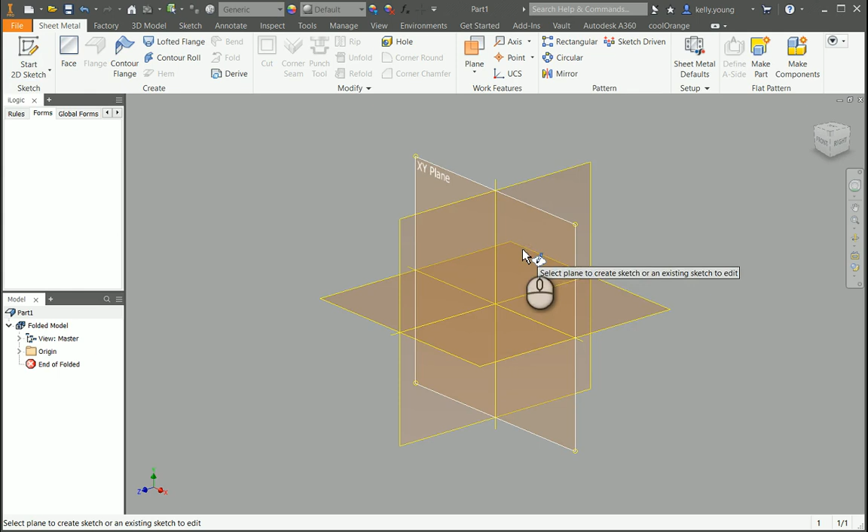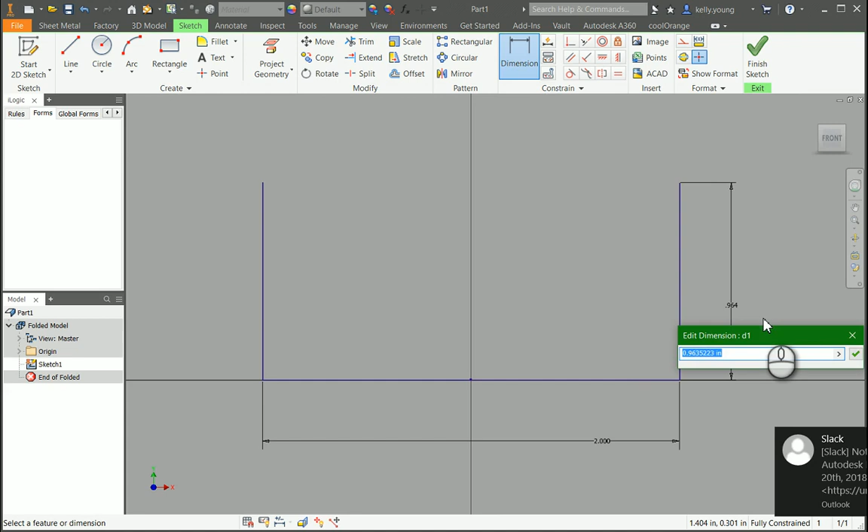Okay, we'll just create a new sketch. Okay, and just draw our lines here and make these equal, and put the center point here to the center here, and set some dimensions for width equals 2 and height equals 1.5. Let's call it 1.

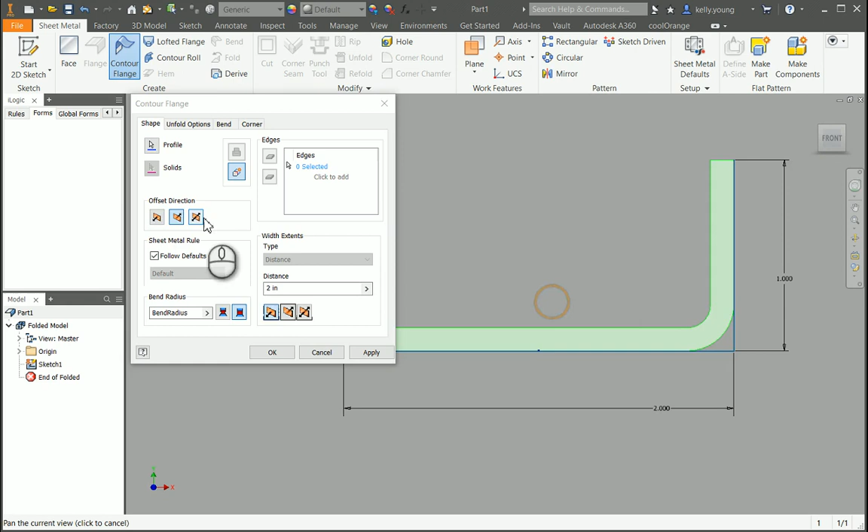Okay, so let's just do a contour flange. Basically select our outside edge. You can flip it inside, the offset direction. So if you actually look at it, you can go inside or outside, so you can control kind of what you want to do. So let's do inside here. And our distance is 2 inches. So let's put that at like 6. So now we have our part.

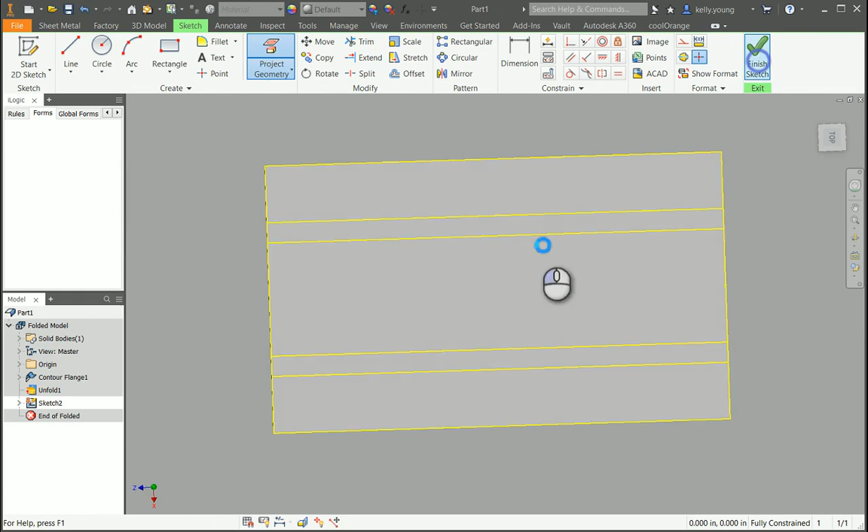We can then create a flat pattern. But before, I'm going to do just an unfold on this face, add all the bends, hit OK, create a sketch, and project our geometry. Finish our sketch, and refold from here, add all our bends, and hit OK. So that basically gives us our flat pattern in the model. You can create a flat pattern after that if you want, and go to our folded part.

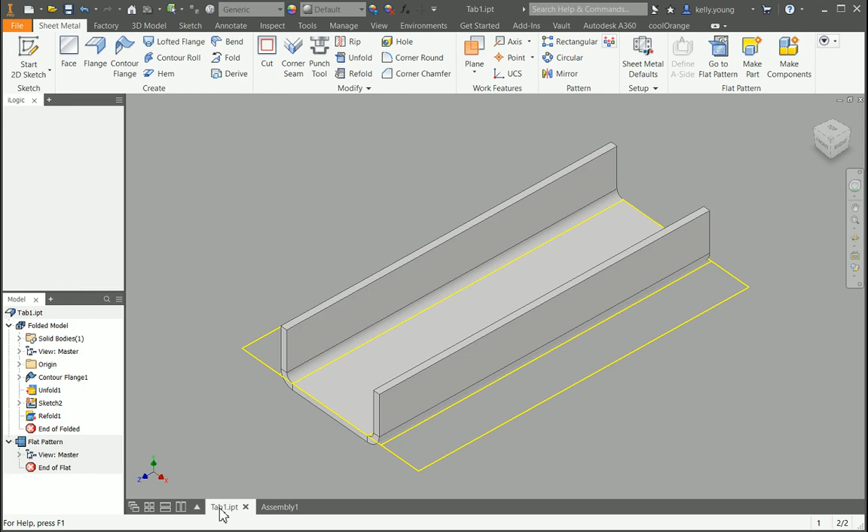So I'm going to save this, call that tab 1. I'm going to create a new assembly here. Go back to my tab part. Just right click on the model, copy it, come into the assembly, paste it in. So now we're going to create a new part and name this tab 2.

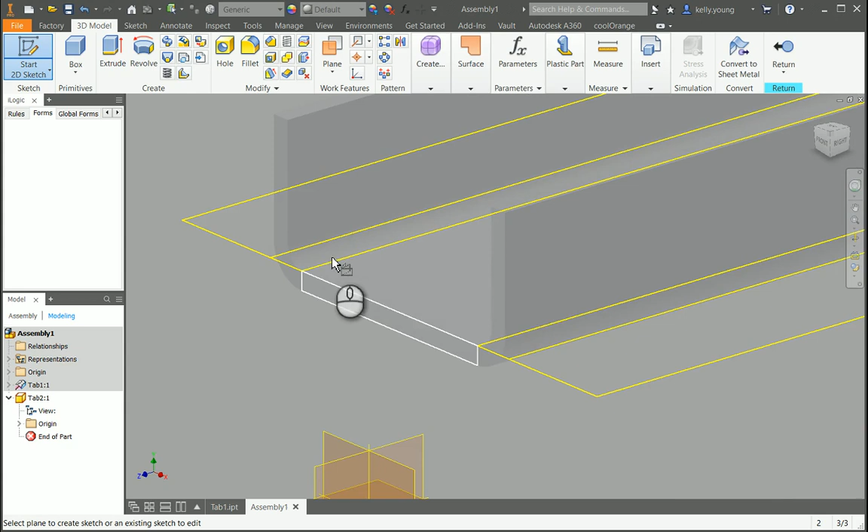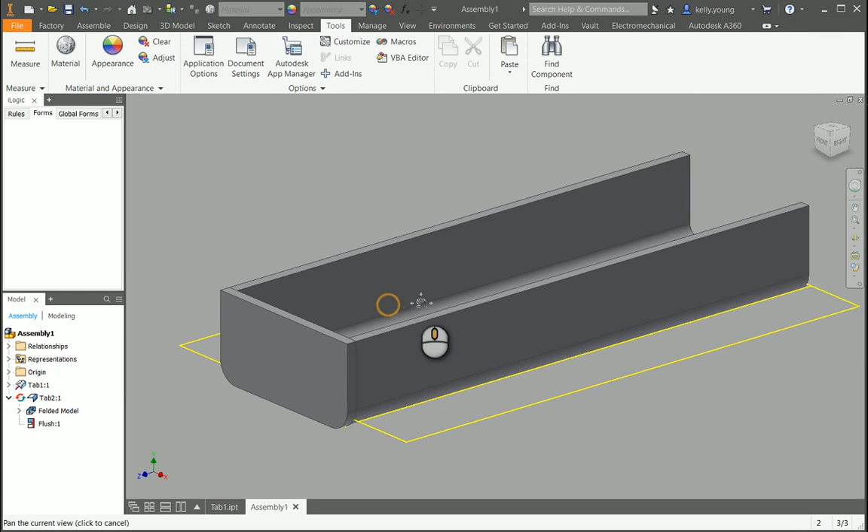Okay, so if we go into our tab 2, let's start a sketch on this end face. And I'm just going to project the geometry around and draw a line through the top. Then we'll just convert that to sheet metal and make a face real quick, coming off the other way, this way. Okay, and return. So now we have our part, and here's our little tab, here's our little thing.

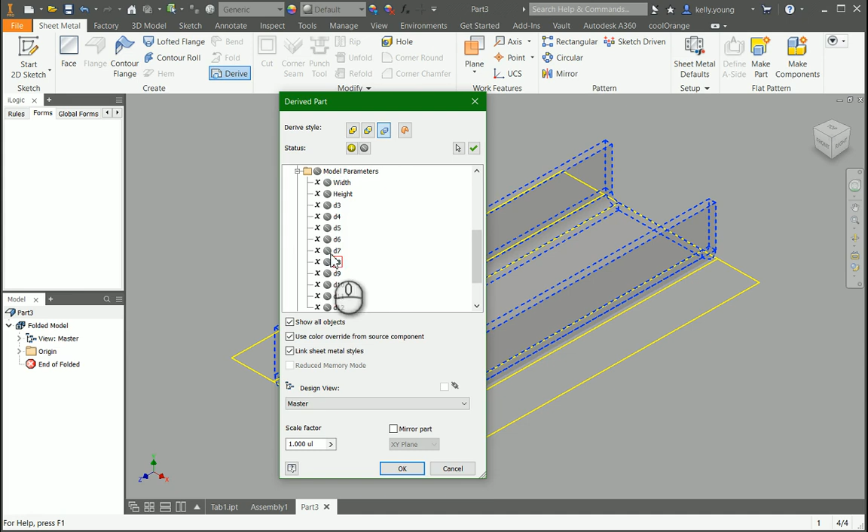So now we can basically create a new part of sheet metal. So you select the part. Now I'm going to turn off all the solid bodies, and I'm only going to bring in the sketch 2. You could bring in this first one, but we're also going to bring in the reference parameters of here. So height and width, and also the sheet metal thickness. I'm going to bring that in as well. So now we have our part.

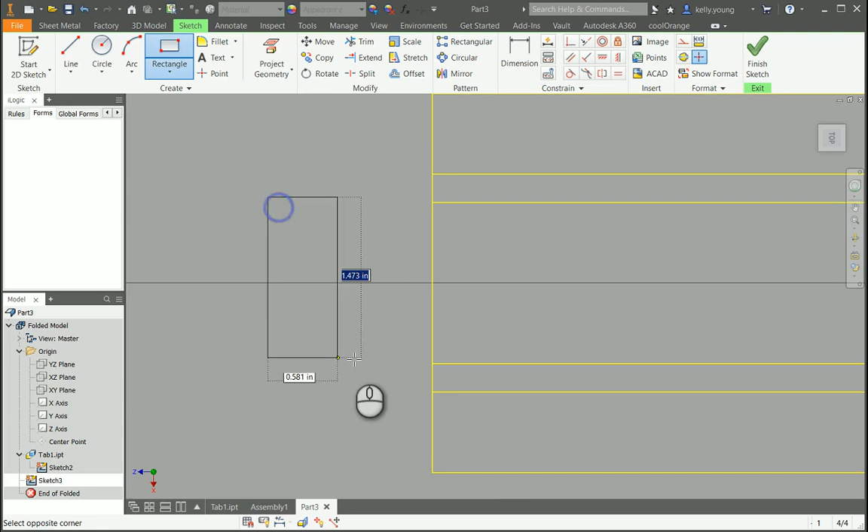So we can go to our origin here, tab 1, and create a sketch. And we can do that. Call it our fillet at thickness times 2. Call that at the width. The height. And we're just going to draw a little box right here.

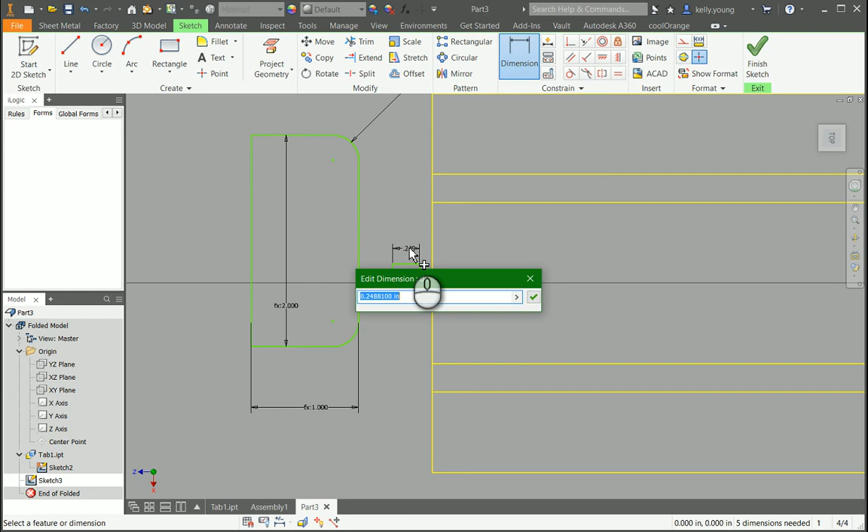And put this right there. Take that line, project it, so we can actually select the middle of it. And there. Now we're fully constrained. So you have your little part here. Finish our sketch. And then we'll make a face of, oops,

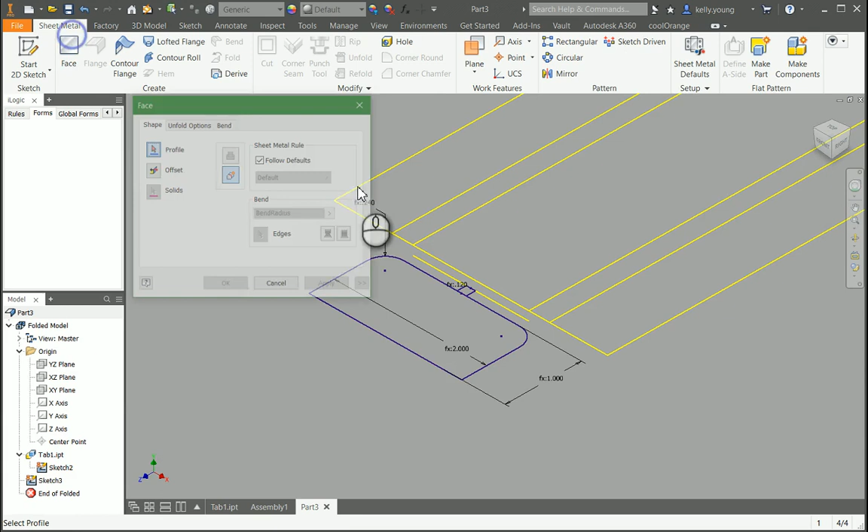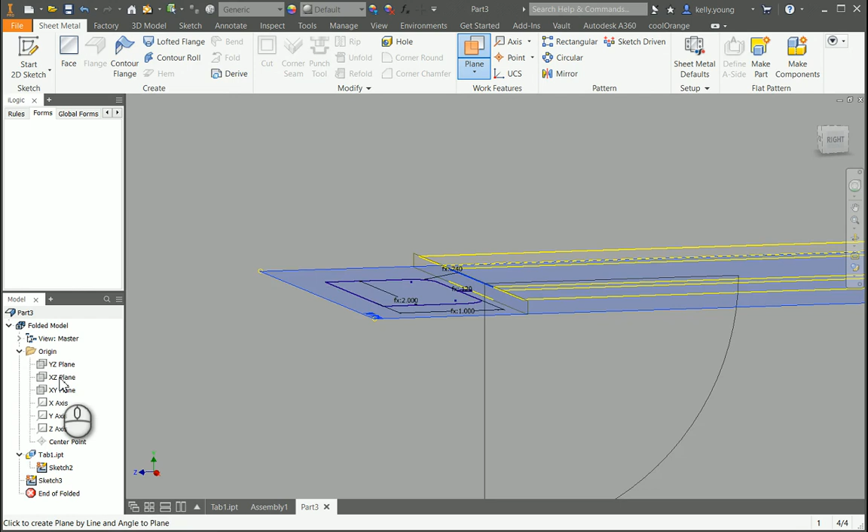are these not all in the same plane? They are not. So let's redefine that to, oh, looks like I was terrible. Okay, let's create a plane on that line to here and redefine that to there. There we go. That should be a little bit happier. And face. So we should be able to select all these and not these two.

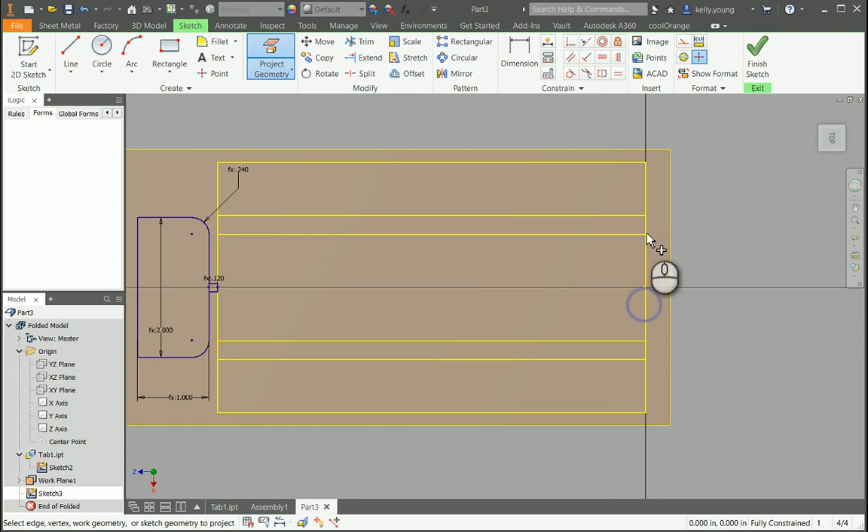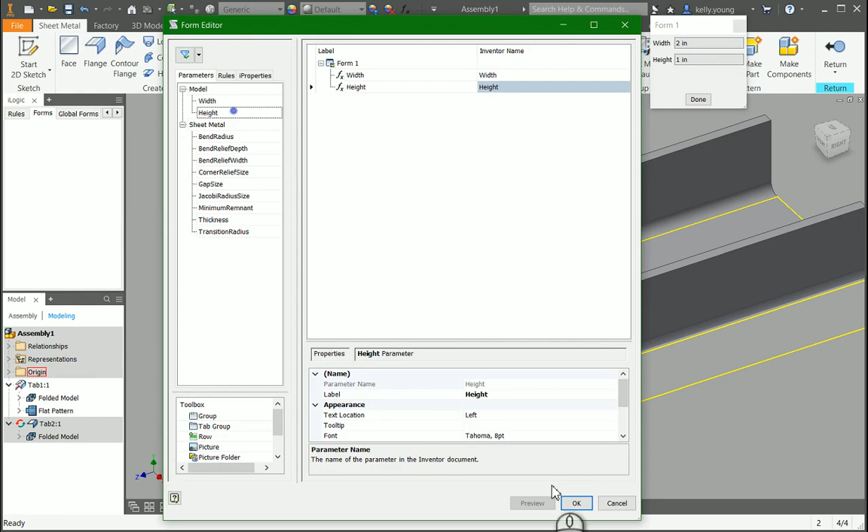So there's your model. So as far as if we go back to our assembly, and you go into the main part, and let's add our form here to our width and our height. So we can change that to 3 and change that to 4. Sure. And that'll update. So our flat pattern updates, our tab updates, come to our part, update that, and that'll update as well.

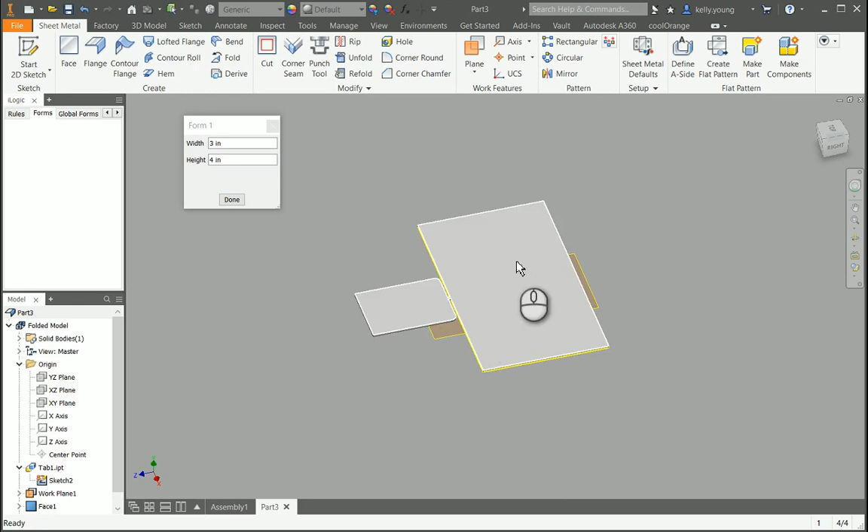So you still got your little tab, you still got your parts, they update, so whatever your kind of design goes from here, you can then update it through the other part. All right. So hopefully that gives you a little bit more of an idea of how to control some of this stuff. And that might get you going.